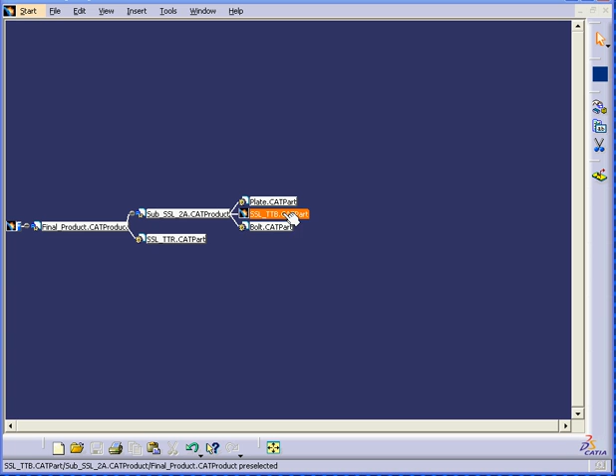We seem to be missing a part. Let's click the desk to go find it. Right-click on this part which appears to be missing. Select Find. And here's our part. Open it. Now let's close the desk. And here we have our components.

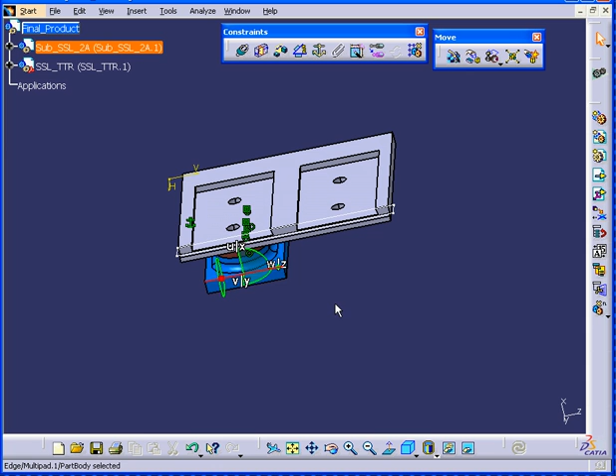Next, we're going to use the compass to position the components. Now we need two of these components for this assembly. Let's right-click and copy. Right-click and paste at the assembly level. You'll notice that when I copy, I click at the component level, but when I paste, it's at the assembly level.

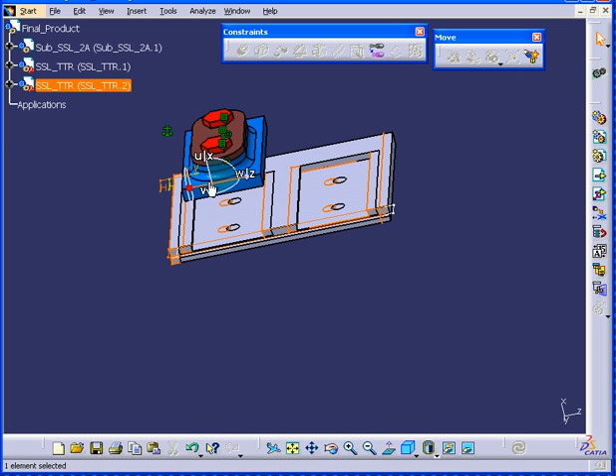Now on the component I just highlighted, let's move it. Oops, it's actually not highlighted. Okay, I see what's happened. I've copied the wrong component. All right, let's fix this. Right-click. Let's go back to the assembly level and delete the component. Now let's go get the right one. Right-click, copy, and back to the assembly level where we paste it.

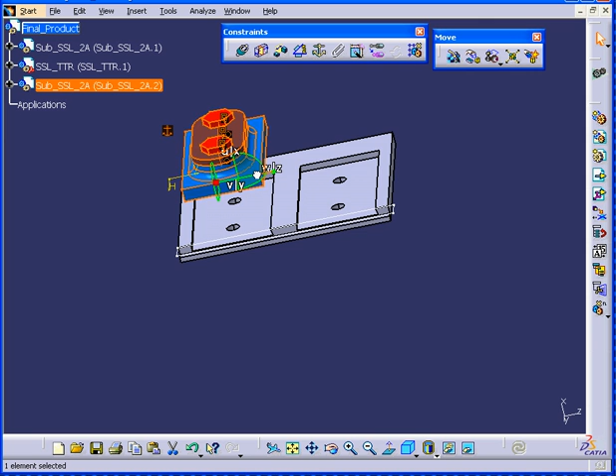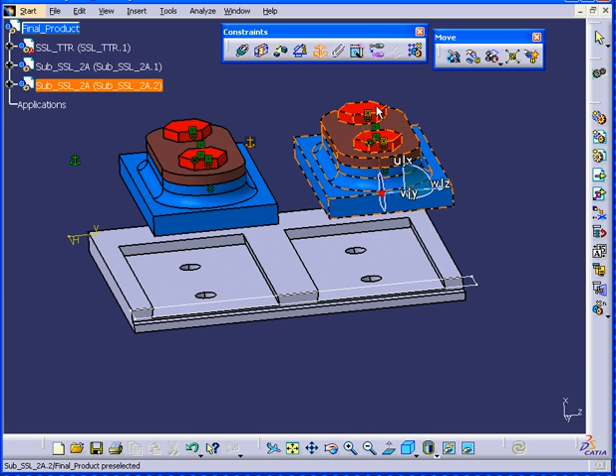Okay, now we've got the right component, and once it's selected, we can move it. Okay. Now let's rearrange our tree. Move it down, apply, click OK. Now let's use Fix Component and fix this component.

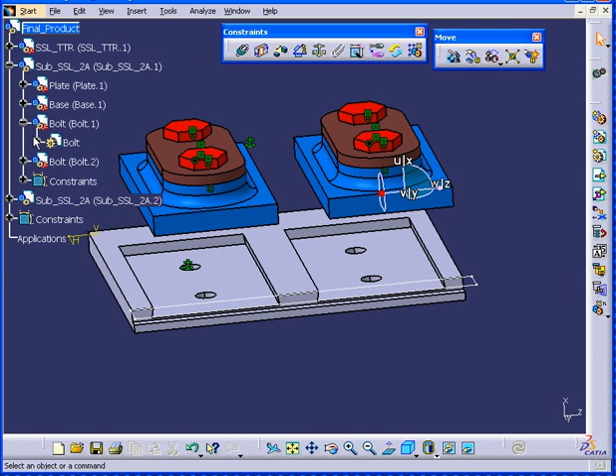We do need to hide these bolts. So let's right-click after we expand the specification tree. Selecting Hide/Show. One bolt is moved to No Show. But we do need all four to disappear, so let's bring this back. And let's go deeper to the part body level. Right-click, Hide/Show, and now as you can see, all four bolts are hidden.

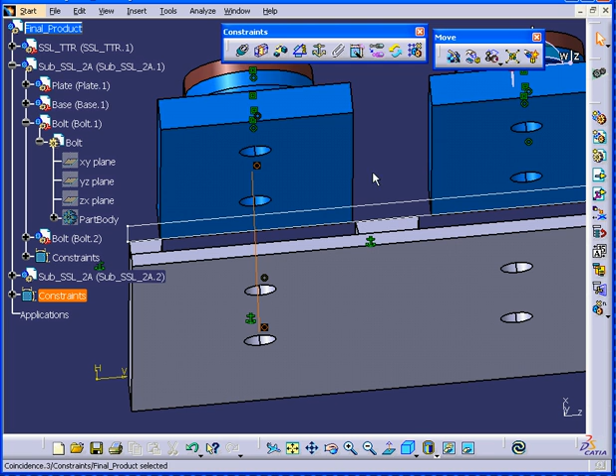All right, we're going to constrain our component now. First is the coincidence constraint, to constrain this hole to this hole. Second, this hole to this hole. Third, this hole to this hole. And lastly, this hole to this hole.

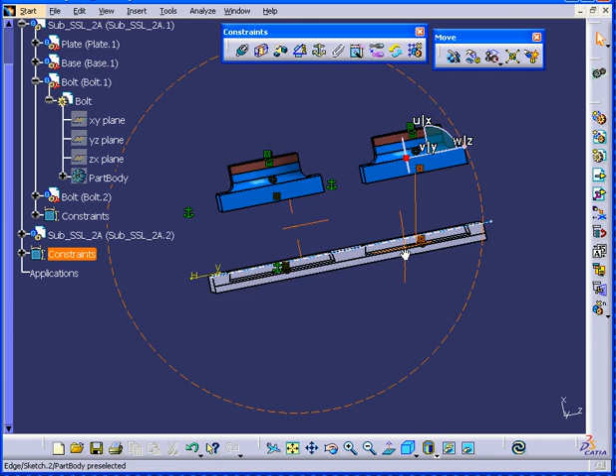Next, we will apply the contact constraint, this face to this face. This face to this face. Let's hit Update. As you can see, our components are constrained. All right, let's bring the bolts back. Right-click, toggle back to Show. OK.

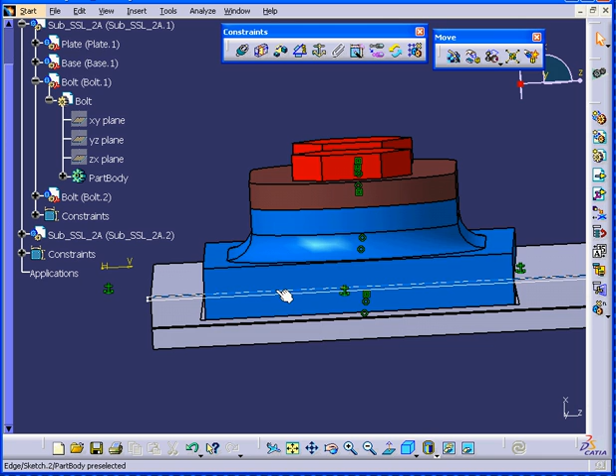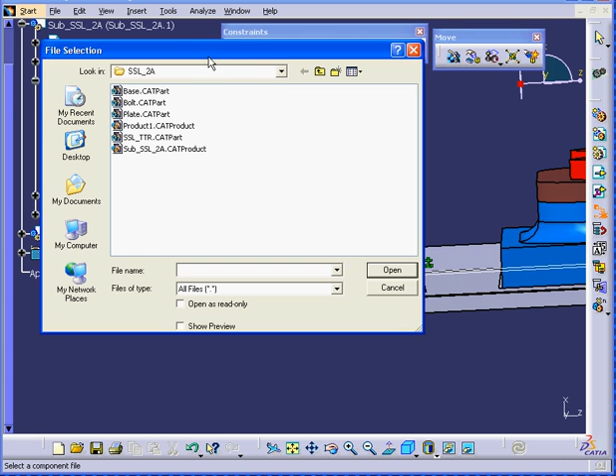We seem to have a problem here. It looks like this part doesn't match the base exactly. Well, let's replace this component. I can use the Replace Component function from the Product Structure toolbar. Or I can right-click on the component, select Components, select Replace Components. Now we navigate to find the right component and we open it.

CATIA prompts us, asking us if we want to replace all instances of the selected element. We will choose Yes and click OK. Now, as you can see, it fits perfectly with the base.

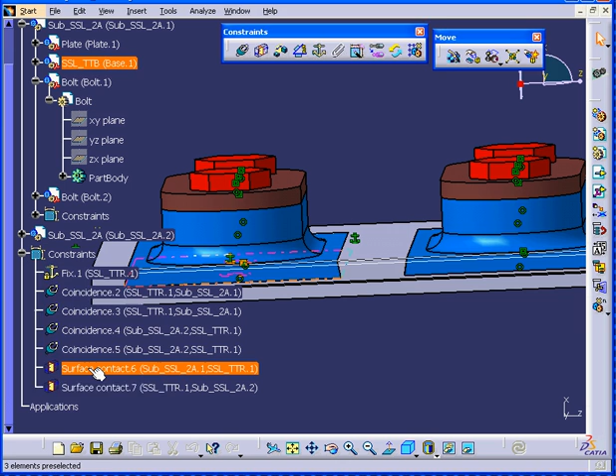Sometimes when you replace components, some constraints will get broken. If that happens, you will see a yellow exclamation mark in the specification tree next to the component. When this happens, you have two choices. You can delete the constraint and create another, or you can double-click on the constraint and select More. And right here, you will see the word Disconnected. You'll need to click to reconnect and then click OK.

Next, I'd like to show you, let's collapse and expand the plate component. Okay. You'll see I'm in the Part Design workbench. I double-click on the plate at the part level. All right, let's add some chamfer to this part. Click on the edge, enter a value of 1/8 of an inch, hit Tab, and preview. When I click OK, you will see that the changes will be applied to this plate as well.

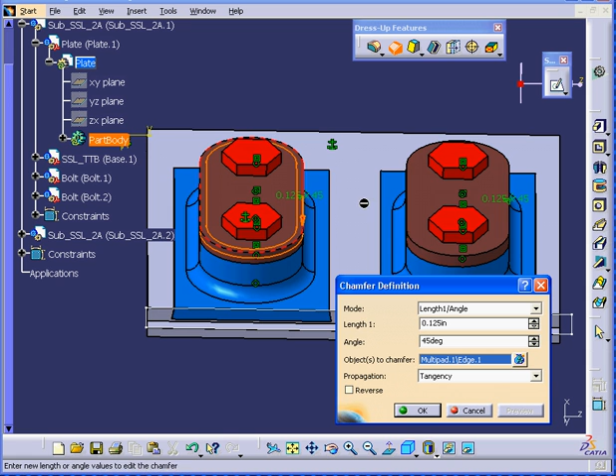As you can see, basically you can make adjustments at the part level anytime. After making your adjustments, you may go back to the assembly level and keep assembling your components. And this concludes our third tutorial on assembly.